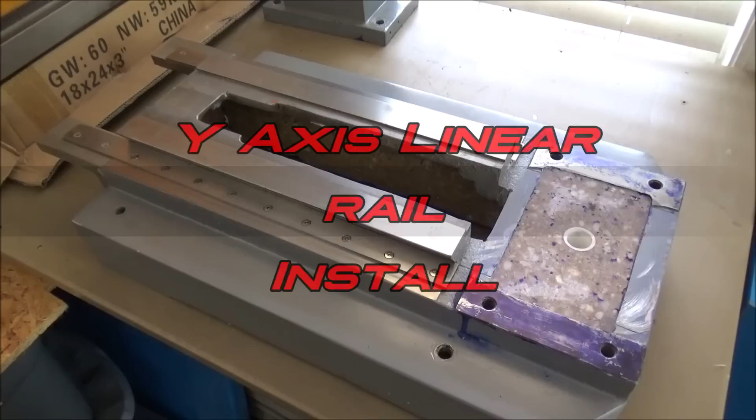Alright, well I'm out in the shop today and I've rearranged my base and we're getting ready to start mounting the linear rails to the y-axis. Now before we mount our linear rails, there are certain tolerances that we're going to have to follow in order to make sure that we get the accuracy and the results from the linear rail conversion that we are expecting.

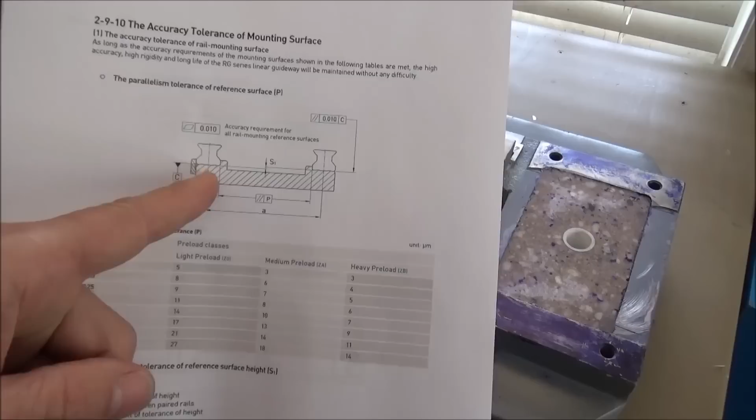In the paperwork that I downloaded from HIWIN, there are certain tolerances that we need to try to follow for the RG series. And these are the three. The first one is parallelism. The maximum parallelism tolerance for the distance between rail and center line of rail to rail is this P measurement.

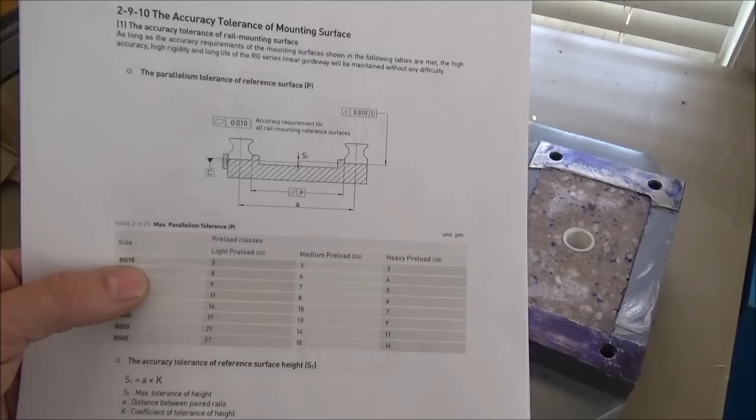For the RG15, which is what we're going to be using on our X and Y axis, it's 5 microns. I know for sure that I need to have my datums parallel within 5 microns to start, otherwise there's no sense in starting to mount the rails.

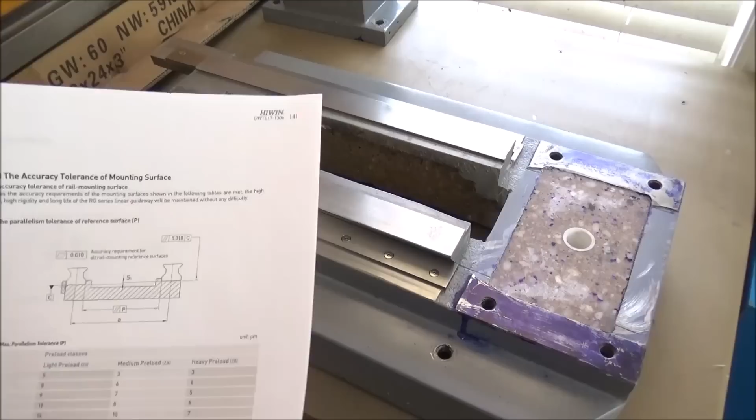So I've checked these and it looks like, fortunately, I've got mine set to around 2 microns.

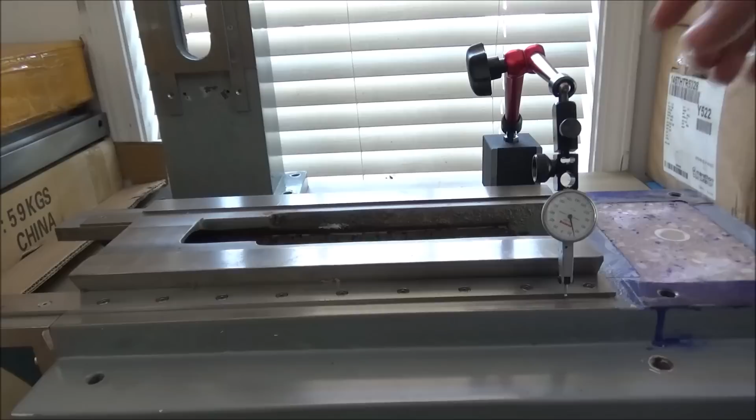Now I'm going to see if I can get a video of this while I'm trying to move it. It's extremely difficult to balance the magnetic base here and move it at the same time. So, you know, these are extremely sensitive. We're talking microns here, so hopefully you'll be able to see this in the video. Maybe I can get most of it in that shot right there.

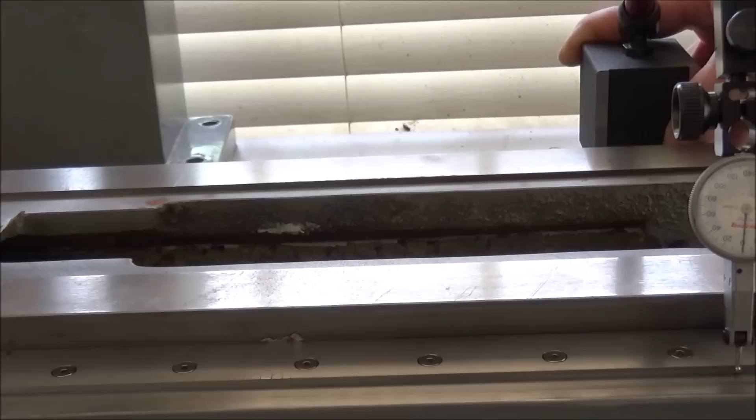So you can see we're kind of at 0 now. I'm bouncing. Alright, there we go, moving off a little bit there. Maybe 3 microns, and then it kind of goes back. It may just be me. Yeah, it looks like right in there, and then it goes back. So we're about 3 microns, and our tolerance is 5 microns.

So I'm pretty happy. I think once we get the rails mounted, it's going to change a little bit because the rails, of course, aren't going to be wavy, they're going to be fairly straight. So we'll see. I'm going to get the master rail set, and then we will, of course, check all this as we go along. Some of the other tolerances are...

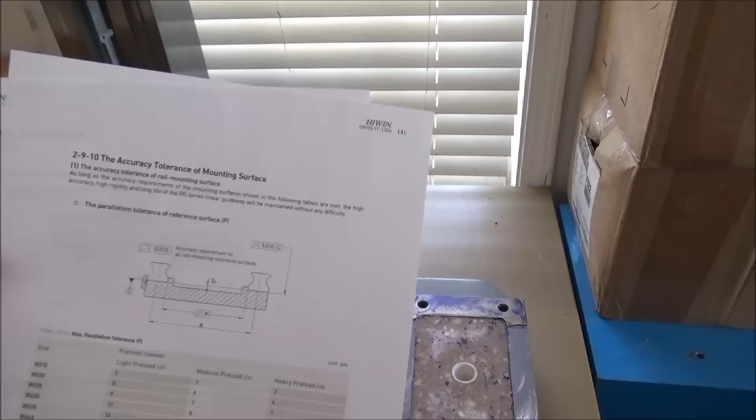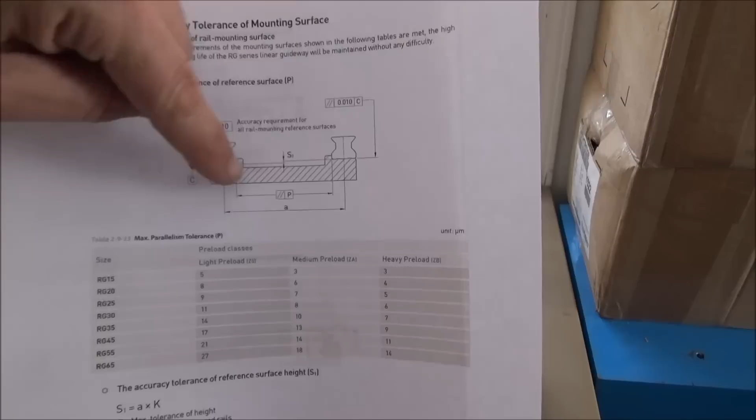S1 here, which is our height tolerance, the distance between the bottom of one rail and the bottom of the other. Now, there's a formula that you need to go by, which is the distance between the center of one rail to the other times K, and K is that for light preload class.

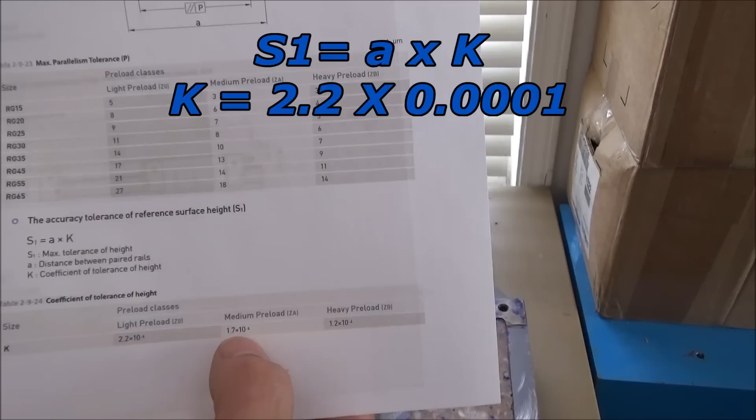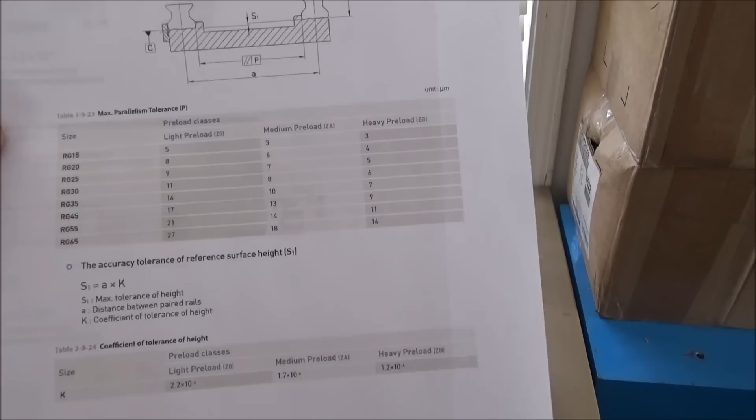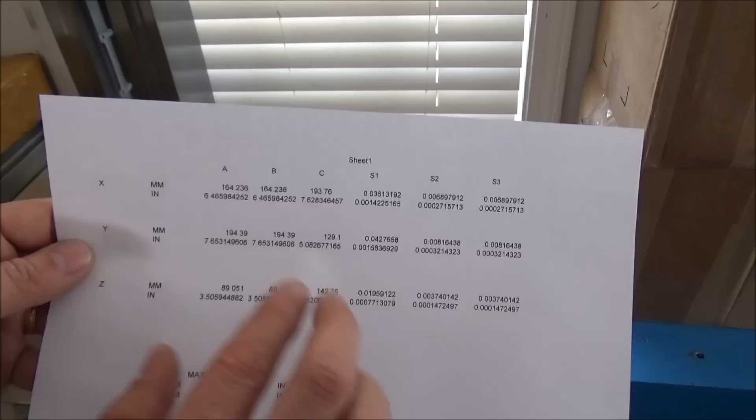Medium preload class is 1.7 and heavy preload is 1.2. So depending on which class of rail you got, ours are Z0, we're going to use this 2.2 times 10 to the -4. Take this formula and put it into a spreadsheet here, and for each one's different for the X, Y, and the Z because of the distance between the rails.

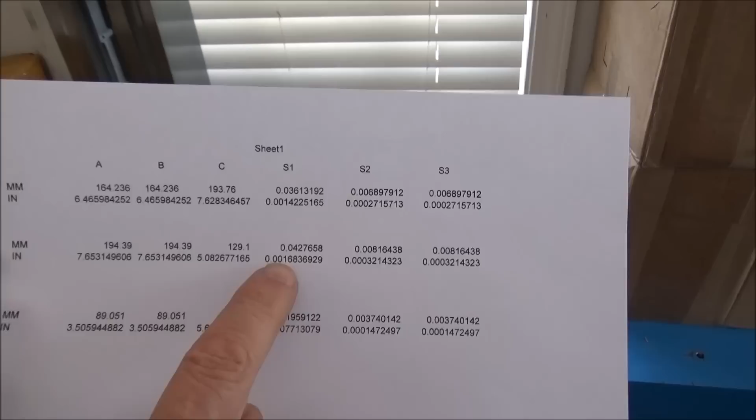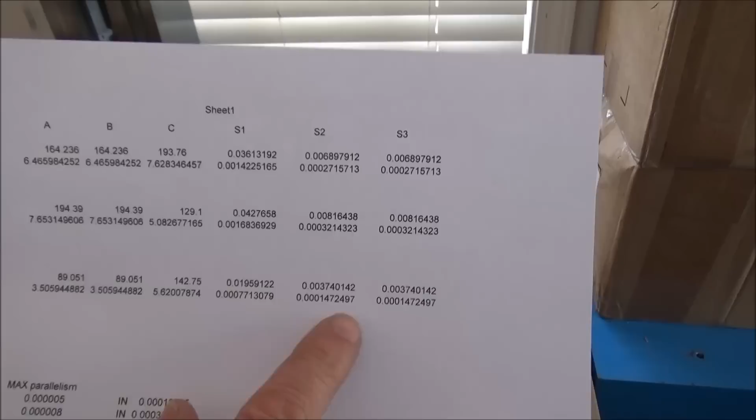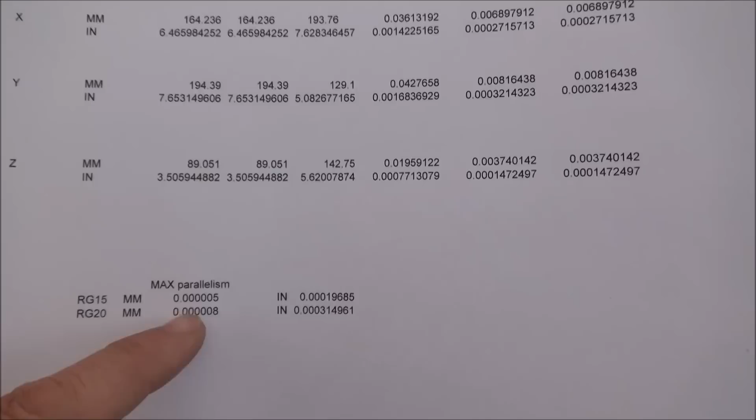Next is S2. S2 is the height of the 2 blocks, and S3 is the height between the front and the back block. Again, I did all these on a spreadsheet. For S2 and S3, it's about 2/10 on the X and about 3/10 on the Y and about 1.5 on the Z. The parallelism, this 5 microns, is by far probably the greatest tolerance that we need to try to maintain.

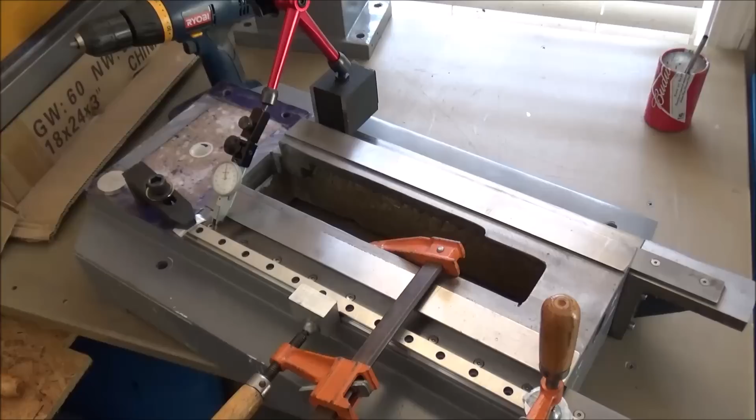Alright, so I'm going to get set up and we're going to start mounting the master rail on the Y-axis. About ready to start mounting our linear rails. Now what I've got here is I've turned my base around so that I can reach this side, because I'm going to work on this side first. This is the master side. The rail has to be put on in a certain orientation.

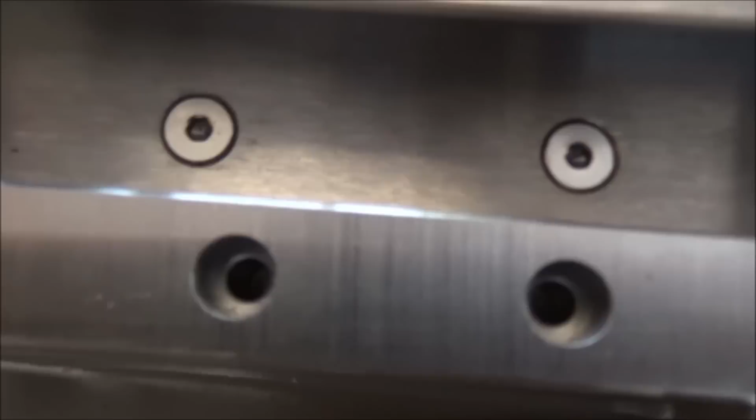Hopefully you can see this right there. No, maybe not. Oh, there, maybe you can see it. Catch it just right there. There's some arrows, and they're pointing from the bottom of the word HIWIN up. And that is the side that is your master. There we go, maybe you can see it there. That is the master side.

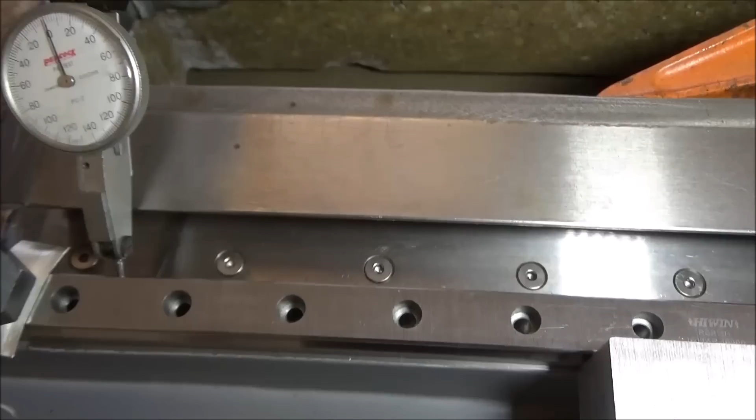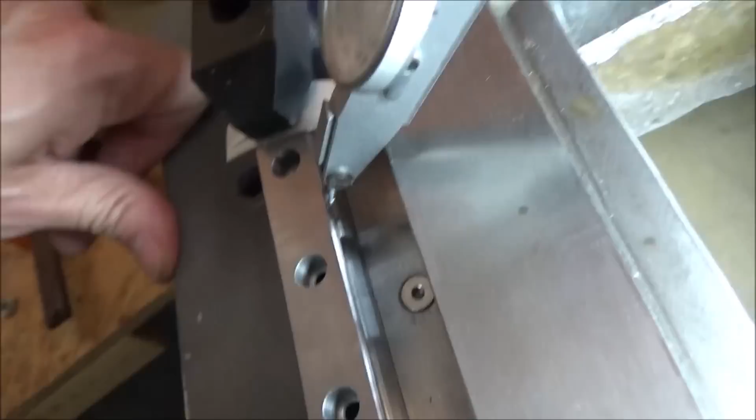So we need to make sure that that is up against our datum, which I have done. I've clamped it into position, and then I went and indicated it again and checked it. You can see that there's this 45 right here, or an angled edge right there. Well, there's also one up under here, and that is what I've got my indicator on. The indicator wasn't long enough to really reach around and get a good position, so that's where I've got it sitting.

And I've indicated this and checked it. Let me get it, I'll show you what we got. You can see the indicator there. Well, at least maybe you can see part of it. Okay, now I can only go from there to where I've got it clamped, but I did check both sides. We've got about the same result.

You can see we're pretty straight right there. Now originally this was pushed out, so I've got a clamp to squeeze it in. It looks like right there we're dead on straight. So I'm pretty happy and satisfied with that.

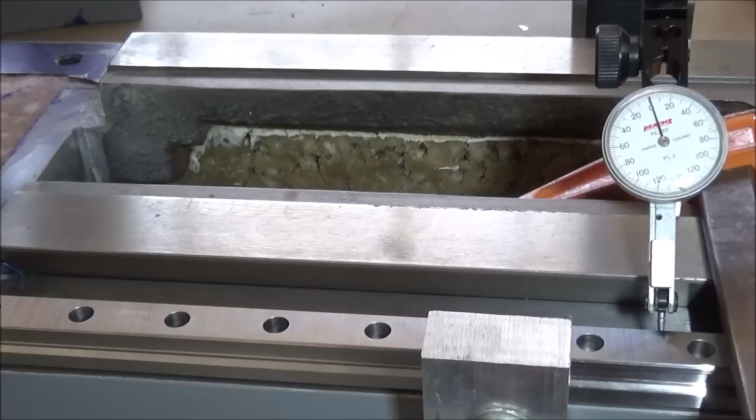I'm going to go ahead and start boring some holes and clamping this down. You'll remember that I borrowed the idea from another gentleman on these little bushings here. I took some bolts, turned them down so that they just fit inside the counter bore, and now I can center drill and bore out each of the bolt holes, hopefully that'll keep everything lined up. Alright, let me get set up and we'll bore a couple of holes and get some screws in there, then we'll continue on down and get this master rail mounted.

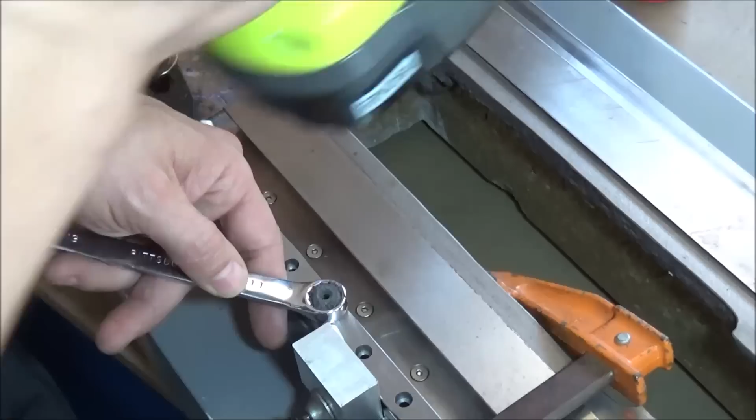Alright, I think it should have been set up better. I need to hit that with the shop vac.

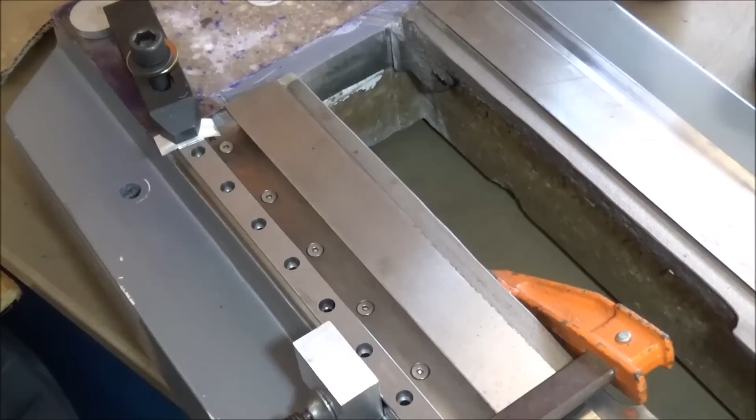I think that looks pretty good. Looks centered, which is good. Bushing worked.

Should be able to just move on down, drill the next hole, next. Everything is still straight, nothing moved. We should be good to go. Alright, so I'm going to bore these holes and then we'll get them tapped.

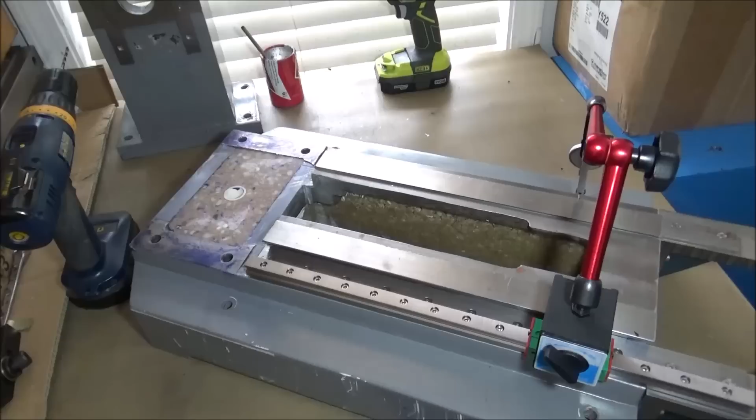Alright, well, I've got my master rail mounted. I've got one of the linear blocks on there.

If you remember, I used this dovetail edge here as a reference when I was setting my datum on the master rail. So I want to go back and check this reference against the rail installation, make sure everything is good. A couple things I'm finding out, and I kind of expected it because I'm not using surfaces that I machined, I'm using surfaces that were already machined from the factory. But this edge right here, this dovetail flat, when you go to bolt this down, we're dealing with microns here, so it kind of moves a little bit. So it's not perfect.

The only way to get around that, I think, would be to actually machine this datum in here, which if you don't have the ability to do that, then for me this was the best alternative. So let me spin this around. Boy, I tell you, with this epoxy fill, this base got really heavy.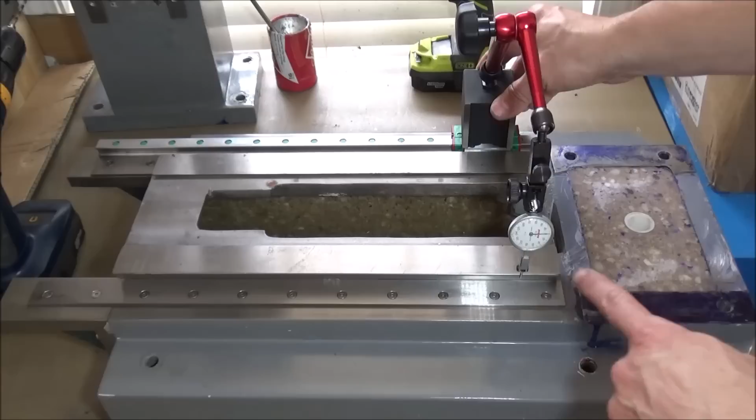I've got the indicator here sitting on top of the linear block. You can see there's no movement, there's no wiggle back and forth, side to side. It is pretty rock solid. So I can imagine once you get four of these blocks on here, how nice this table is going to feel.

If you recall, when I installed the datums, I set up the master datum using this as my reference plane. So I'm checking that against my linear rail setup here. I don't know if I can get a good shot of this, but let's give it a shot. So we move it across here. Pretty happy with the results that I've got here.

Next, we're going to install the sub rail. Alright guys, well, I've got my secondary or my sub rail in place. I've got it clamped on the ends, and I'm just trying to figure out how it needs to move.

It actually looks pretty good. It's pushed out this way just a little bit on this end, needs to go in, and in the middle here needs to go in a little bit. Right now I'm pretty happy with where it's at. I'm going to go ahead and get a couple of screws in there, and then we'll work our way around.

So I've got the rail removed, and from drilling all these holes it leaves burrs and stuff, so I went back over it with a stone and just kind of removed all the burrs, made sure everything was nice and smooth. Just kind of cleaned everything up.

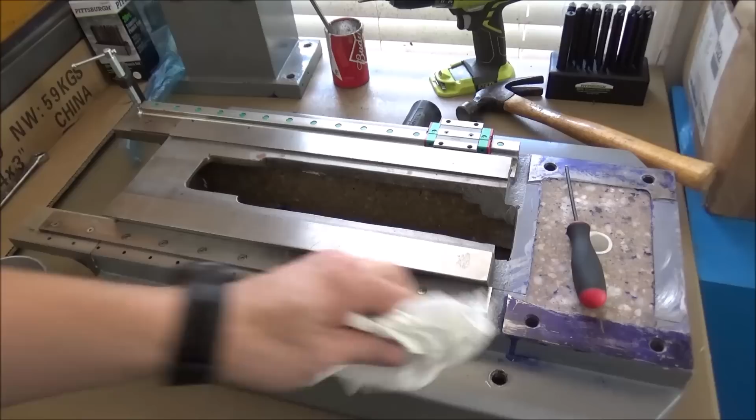I'm going to clean it all off again, and then I can start trying to set this rail. I want to check the height from this rail to the master rail, make sure that height is within tolerance.

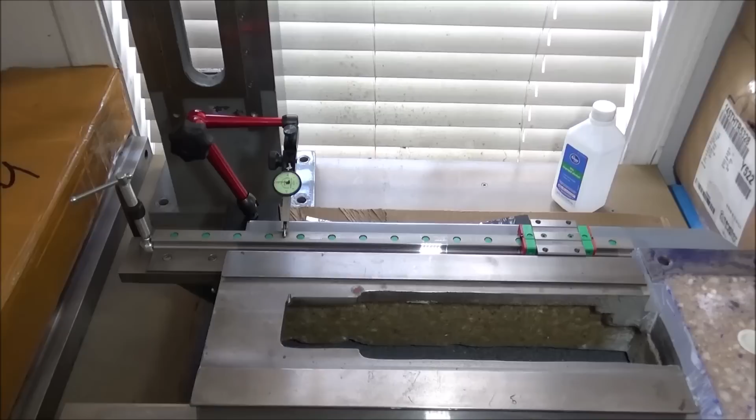Alright, so now I am getting ready to permanently mount my sub rail. I've got my base back on the surface plate here, and I'm checking the height and comparing the height of the master rail to the sub rail.

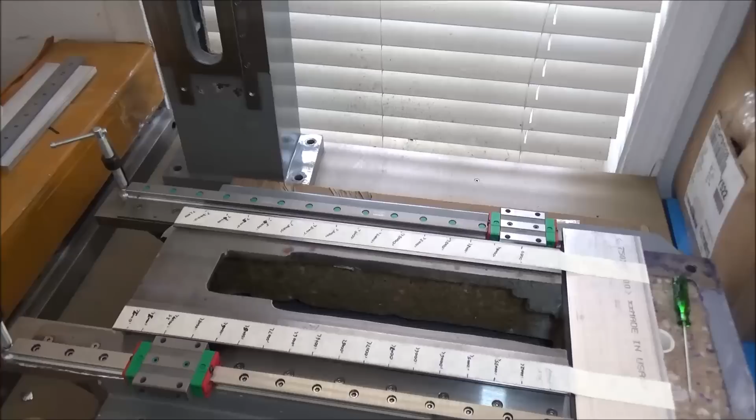Alright guys, well I'm out here in the garage today and I'm continuing to work on my linear rail project. I had trouble finding some shim stock.

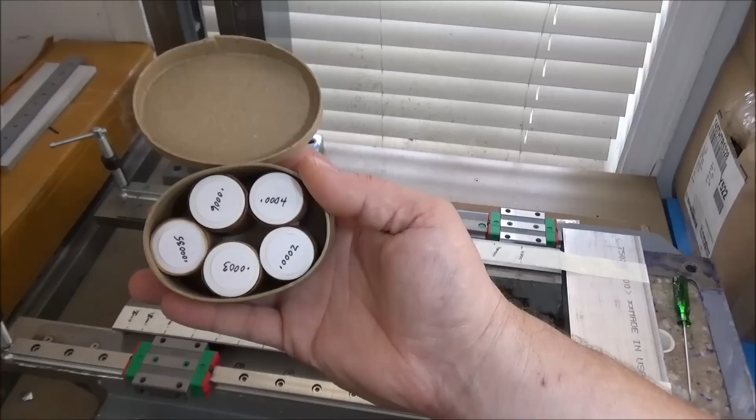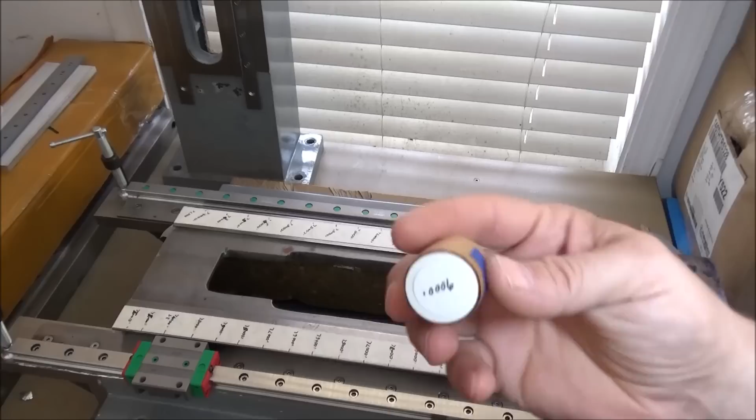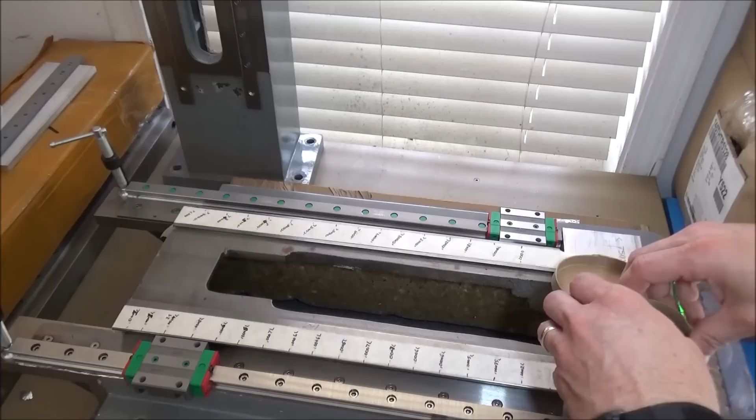Aluminum foil is about a half a thousandth, or 5/10, and I need something a little bit smaller to get my rails set the way I want. So I found this shim stock here on eBay. This is onion skin, and it's really good. It's supposed to be oil resistant, water resistant, but it's real thin paper, basically some kind of paper, and they call it onion skin. So it's not cheap, about $10 a roll. These are 20-foot rolls, so hopefully I've got enough here to do my linear rail conversion.

What I've done is I went along and found my high spot, which happens to be this corner right here. So I set my 0 here, and then I went down and measured from the top of my surface plate to the top of my block here in 1-inch increments all the way down, and I marked down the readings. Since that's the 0 point, I'm going to shim everything else, since it's low, up to this particular point, and then they should all be the same height all the way across.

So I tried shimming it with the aluminum foil, which worked good. However, I don't have the right thicknesses to be able to do it the way I want and get it within tolerance. It needs to be the height of this block, and this block needs to be within 3/10 of each other. You can see right here I'm 2/10 low, and this is 0, so that's within tolerance. Here I'm 0, but this is 3.5/10, 2 and 5/10, 2 and 6/10. So this is out of tolerance right here. I've got a little waviness in the rail, and I'm just out of the tolerance range. The highest is about 4/10 out of tolerance, which is actually really pretty good considering I'm mounting directly to the dovetail.

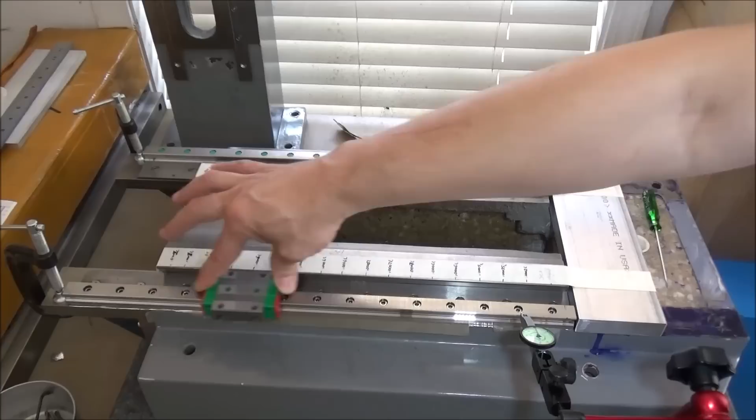Okay, well, I went back, lifted the rail up, and then I placed this onion skin up under here along with some of the original aluminum foil shim stock, and then I bolted it back down, and immediately I could tell that it just feels like it glides really smooth. There's no binding. Before it was kind of tight, and I thought, well, maybe it's just because the linear blocks are new, but it was actually because it was doing a little wave as it was going down.

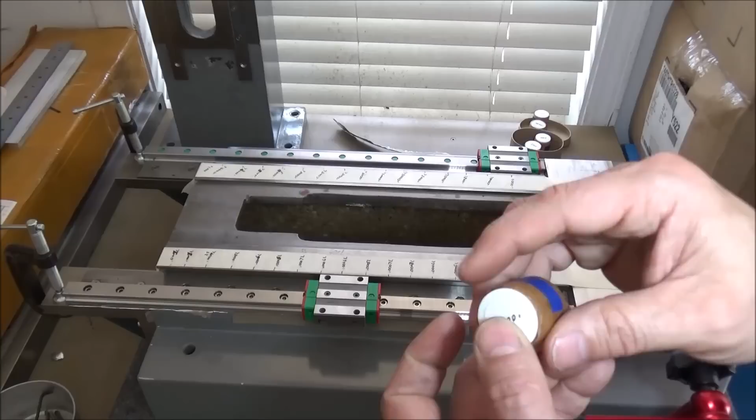It dipped down a good half a thousandth here in the center, and so I used some of these readings here, around 0.0006, so I used some of the 0.0006 shim stock, this onion skin. It's actually very durable. I've never used this before, so I wasn't real sure. I didn't know if it was going to hold up. It is a paper-like substance, but it's almost like, I don't know, a plastic of some sort. It's very durable.

But the biggest chunk was right here in the center, and that was to raise that up. Because some of these readings were just 1/10 out, I'm not going to be able to get it perfect because the smallest onion skin I had was 2/10. I think if I can get it within 3/10 from one side to the other, I think I'm doing good. So pretty satisfied with the way it turned out here.

I'm going to go ahead and switch over to the other side, and I'm going to set the master rail height.

Alright, so I've got my master rail off here, and I've got it shimmed up with the aluminum foil and onion skin as needed. These are all different measurements. It kind of dips down low here and then comes back up. Right at the end, I think it's kind of bit off a little bit, probably from the machining operation originally. But same way I did the other side, and it turned out really good.

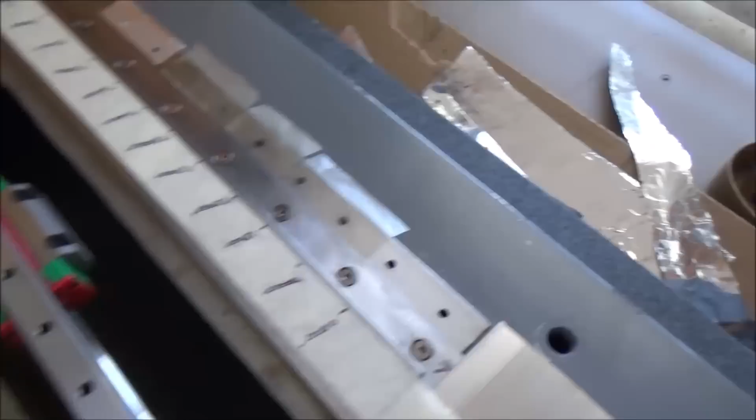So we're going to put the rail down, and then we're just going to check it and see where we're at. Alright guys, well, I've got the height set on my master rail, the height set on my sub rail, and they're within 2/10 all the way around. Actually, there's only about one spot that might be a little close to that 2/10. Everything else is really good.

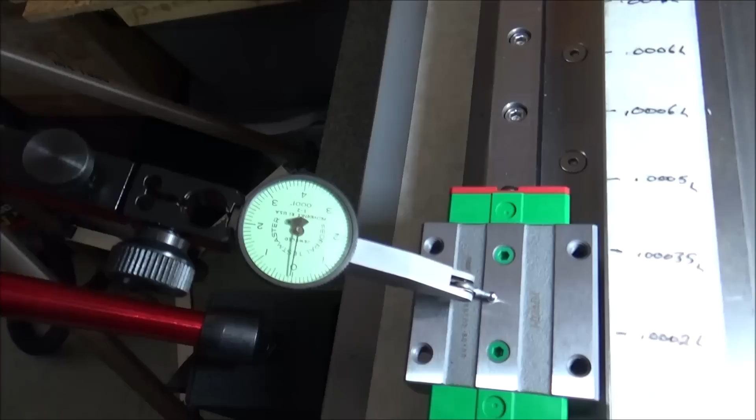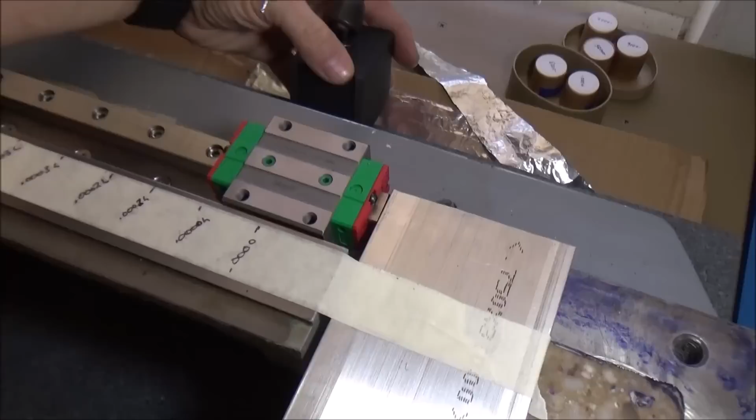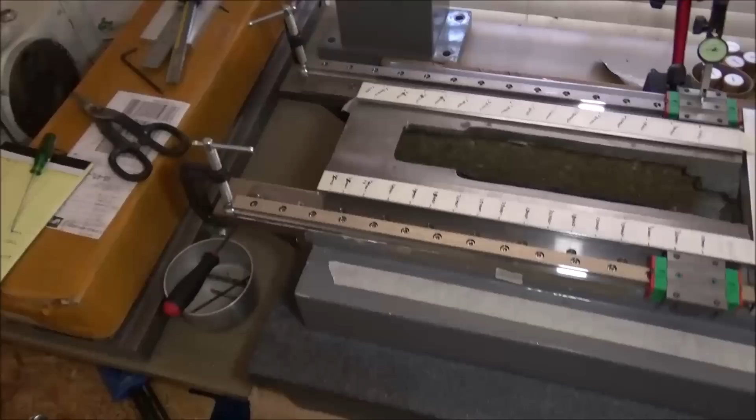So I've got my indicator here set at 0. I'm going to move to the other side here, hopefully without dropping this and messing it up. There we go. You can see we're at 0, and let me move it down. It's going to be hard to hold this and move it, but let me see if I can get you a shot here. So you can see we're right here, we're at 0. Good there.

Really happy. This side was nice and flat pretty much, just kind of a taper, where this side had a dip in there. I wasn't able to get a combination of shims to make it perfect, but most of it's within a tenth. There's one spot that's around 2 tenths, which is good because the height between block to block needs to be 0.00032, and we're well within that, so I'm really happy.

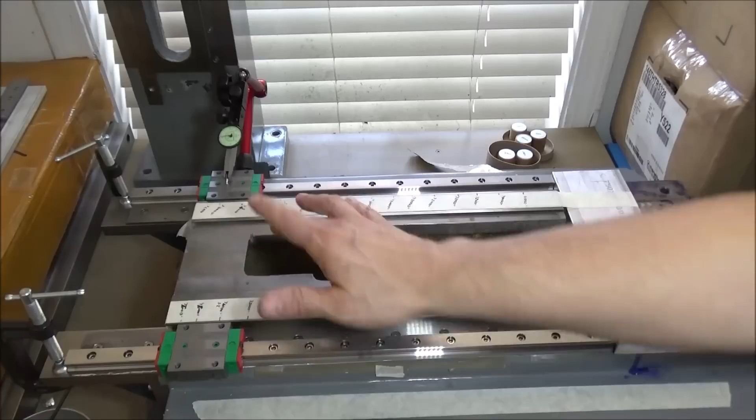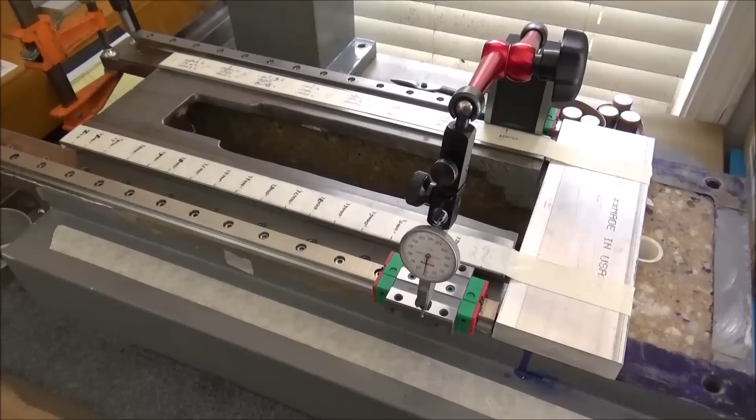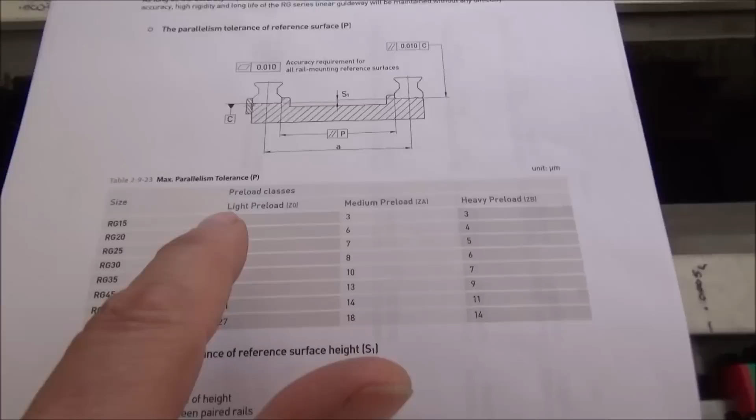Next, I want to make sure that the rails are parallel. Alright guys, I'm out in the shop this morning finishing up the linear rail installation for the Y-axis. I just got done checking for parallelism on the Y-axis here. For the RG series, we're using light preload Z0 blocks, and for the RG15 we need to be within 5 microns. So I'm out here checking that right now, let me show you what I've got.

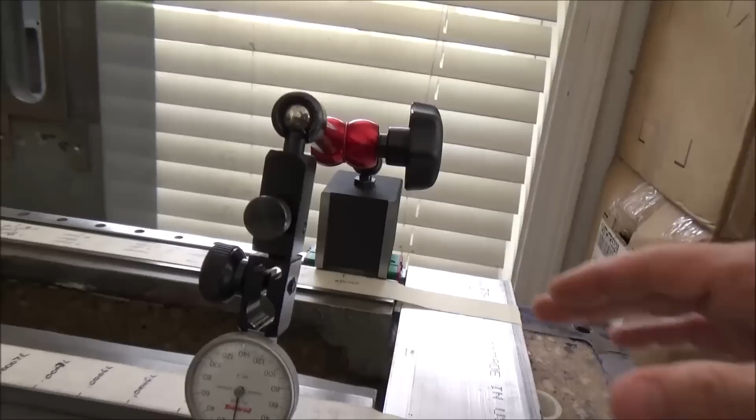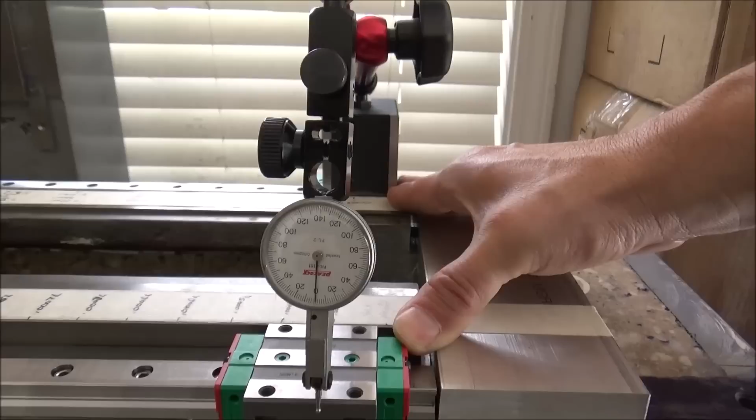I've got my indicator set here. If I can do this, hold on. Pretty satisfied overall with what we've came up with. We're well within the 5 microns there.

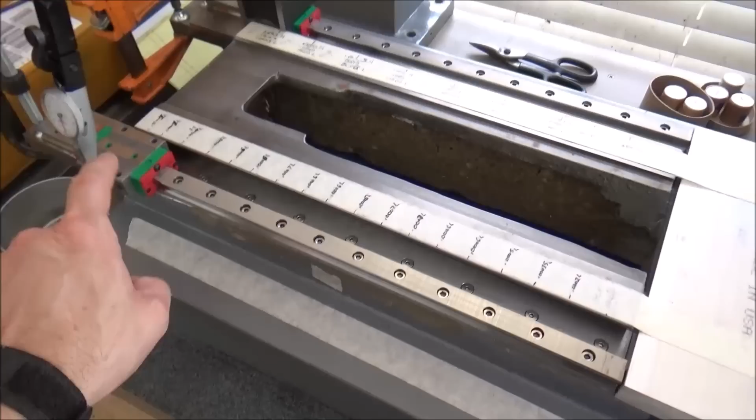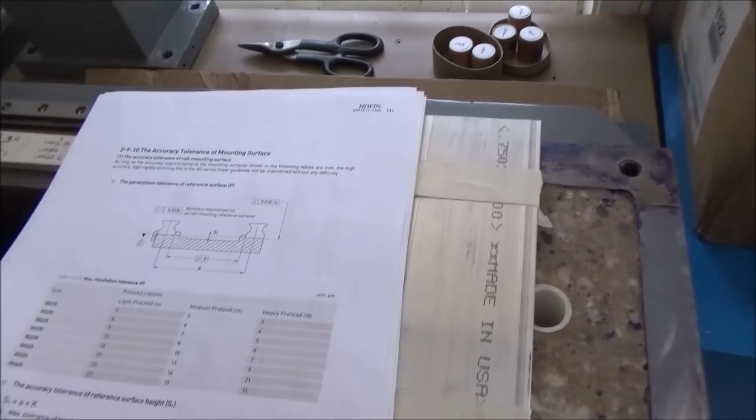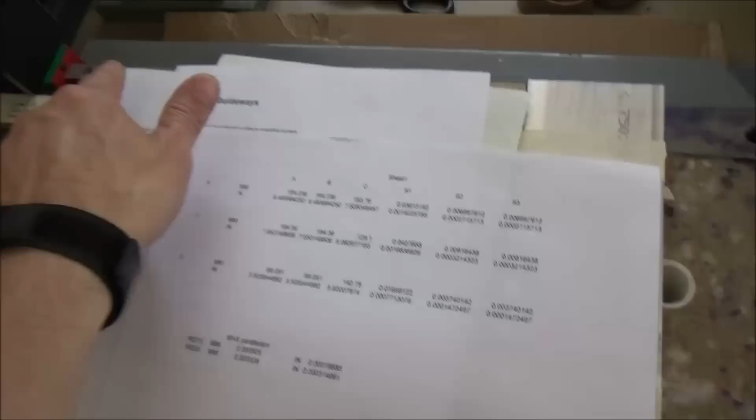Also need to make sure that the top of the block on this side is the same as the other side. So I've checked that off the top of my surface plate here on both sides and got those within specifications. Now the specifications for that height is, let me see here, S1, and there's a formula you have to work out. I did a spreadsheet on that because it all depends on the center line from one rail to the other and what that distance is.

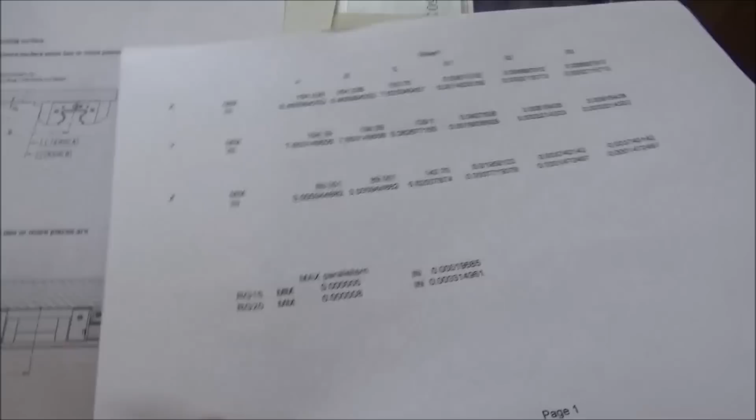For me, S2 needs to be a little over 3 tenths, or 8 microns, and the same for S3 dimension, which is the height from one block to the other on the same rail. So let's check that, and I'll show you what we got. We need to be within the 3 tenths. Pretty happy with what we came up with on that. So let me show you that.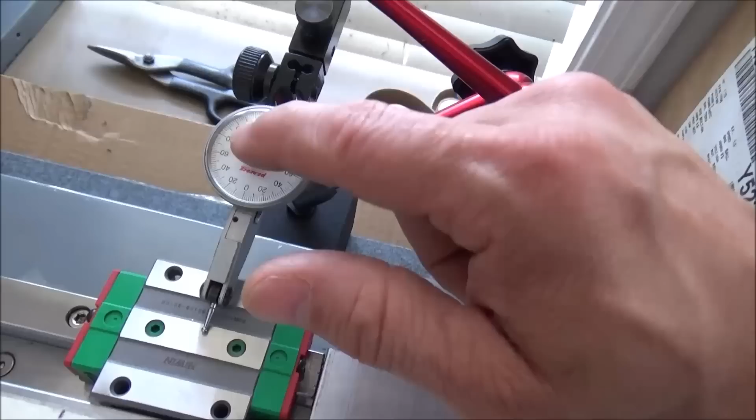Alright, so over on this side, this was my highest point, so I used this for my zero. And then all I did was slide my block down, went around, and checked to make sure it was the same height all the way down. You can see we're well within the 8 microns, give or take.

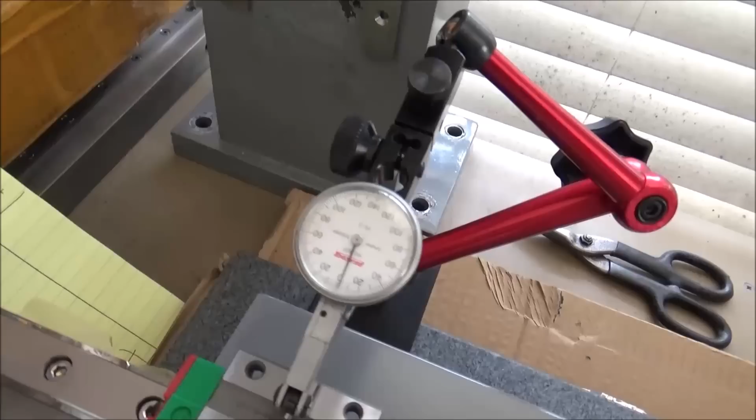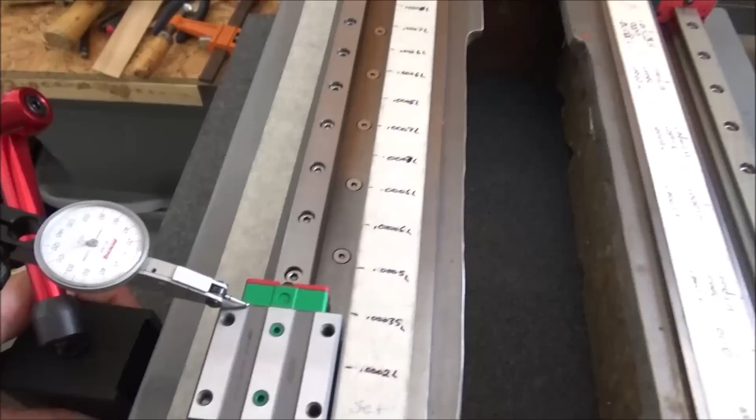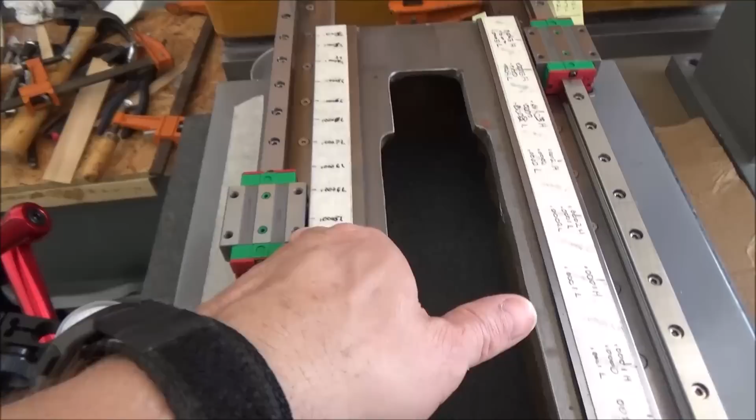Really happy with the way it turned out. It was not an easy task. It took a lot - I've got a lot of hours in this trying to figure out the best method to, A, check it, and B, get it to be consistent and right. You're dealing with numbers that are so small that it's very difficult to not accidentally bump your indicator and throw something off. But you can see I'm well within the 8 microns. That first long mark there is 10 microns. So yeah, it's been fun.

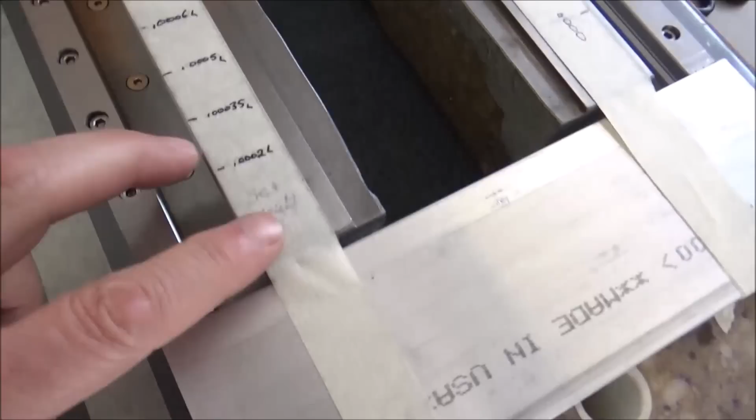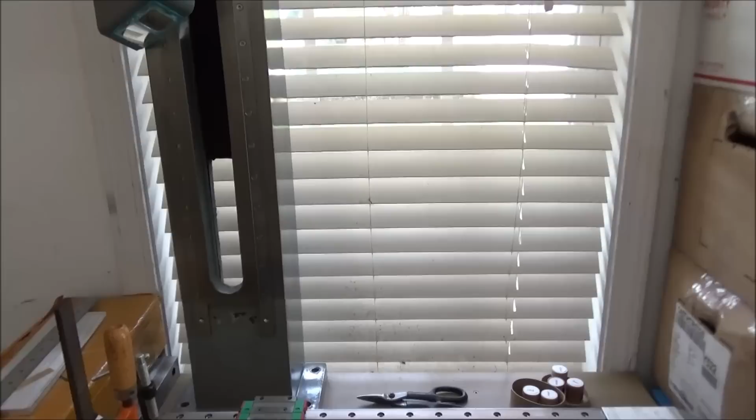I had to pick up - my main problem was trying to find shim stock that I could use, because when I was going along checking my rail height, just like I showed you, I was several tenths out. At some spots it dipped down on this side about 6-7 tenths, and I didn't have any kind of shim stock that would accommodate that. I was using tin foil. Now, one thing about tin foil is your thin stuff, your standard tin foil, is about 5 tenths. If you get heavy duty tin foil, then it's about 1/1000th. That wasn't good enough - I needed something that's going to get me down within the 3 tenths specs.

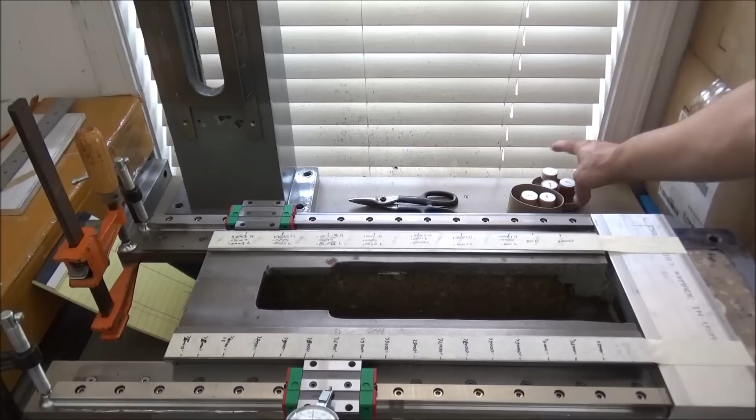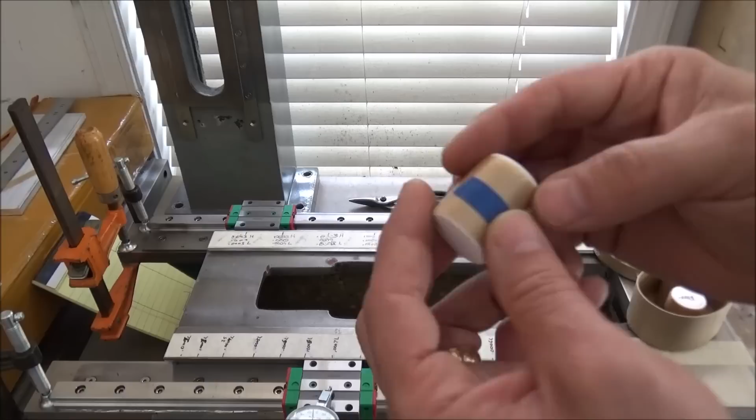So I found online a gentleman on eBay selling this onion skin. Now this stuff, this right here, is 2 tenths - very, very thin stuff. It's supposed to be oil and coolant resistant, water resistant. I picked up some 6 tenths, so I'd have a 1/10 increment there. I got some 2 tenths, some 3.5 tenths, 4 tenths, and some 3 tenths. I figured I already had 1/1000th with the tin foil, so I didn't need that.

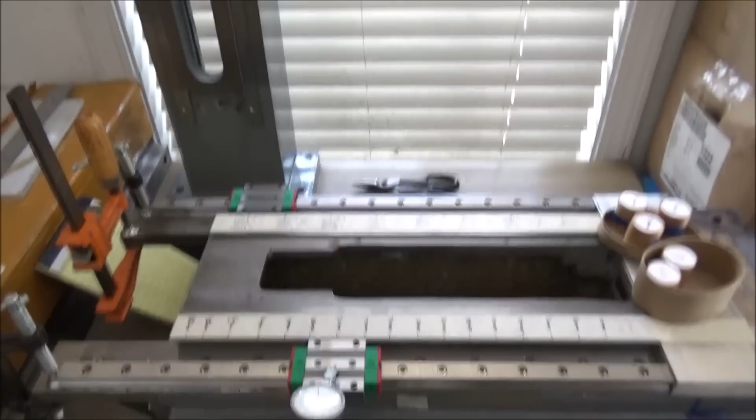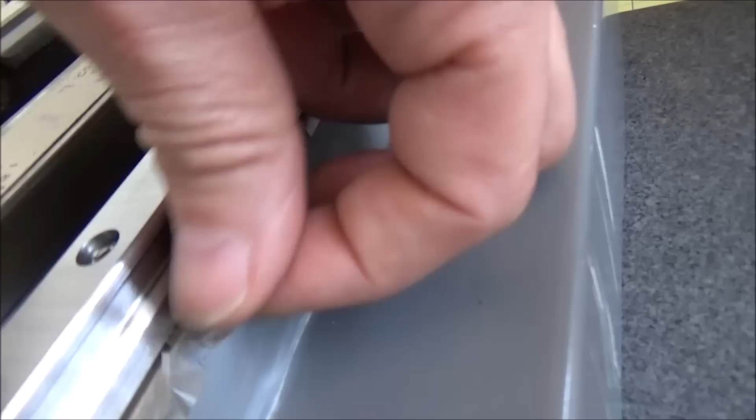And it actually worked out really well, as you can see with the checks here. I just kind of shingled it underneath the rail as I needed it along there, and used a combination of tin foil and onion peel - really thin stuff. We're dealing with numbers that are very, very small here, stuff I'm not used to dealing with. But you can see, it's almost clear, this 2 tenths stuff here. Really satisfied with the overall way it turned out. The onion peel worked great, got me within the specs I was looking for, so I couldn't be more pleased.

I can wrap up now with the Y-axis, start taking some measurements on the width of my 2 linear blocks, so I can finalize my saddle drawing. I'll go ahead and do that while I'm also working on mounting the rails for the table and the column - kind of worked out well.